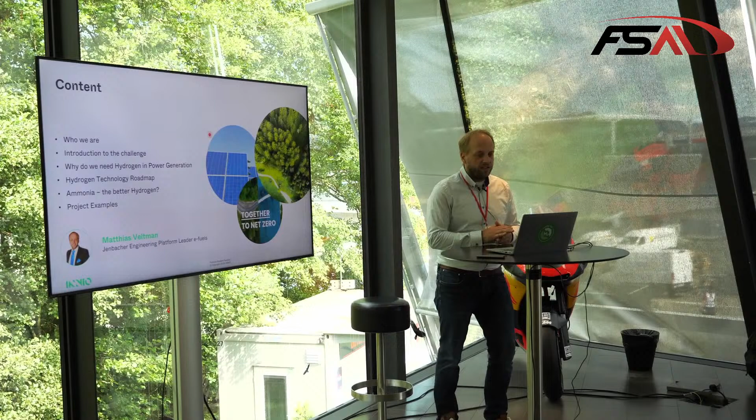So who are we? INNIO Jenbacher really consists of three brands, basically. We got Jenbacher gas engines, headquartered in Jenbach in the Inntal, in beautiful Tyrol, just south of Achensee. We got Waukesha, our US brand for large gas engines, mainly in oil and gas compression applications. And then we got myPlant, which is our digital platform and digital applications, really there to support our customers in operating their applications, their CHP applications or gas compression units, whatever it is that they're using, by providing digital services.

So located with our headquarters in the heart of Tyrol, we have about 1,500 to 2,000 employees right there, and we fabricate all of the Jenbacher engines right there.

And talking of Jenbacher engines, what are we talking about? I said large power generation, and this is the product portfolio basically that you see here that we manufacture in Tyrol. So the smallest engine that we do has right about 200 kilowatts of electrical power output, and we go via our platforms all the way up to plus 10 megawatts of electrical power output. So type 2, 3, 4, 6, and 9, where the numbers refer to the displacement per cylinder in liters. That's where the numbering or labeling comes into place, and you can see we span from a few hundred kilowatts to 10 megawatts in electric power output.

All right, but let's take a look at moving green energy forward, the core of my talk here and what this is all about.

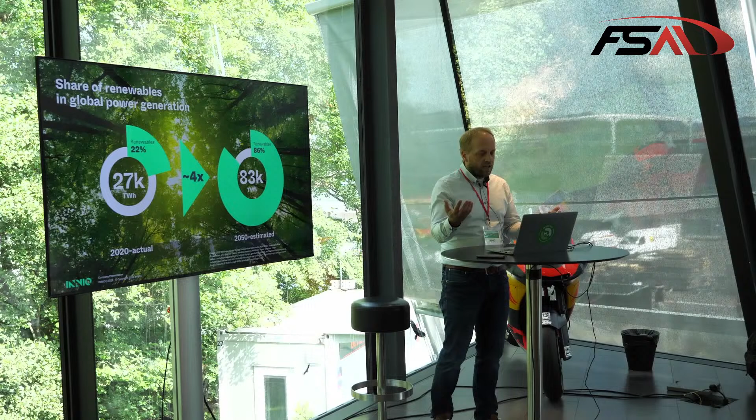So more renewables is an absolutely good thing, but there do come some challenges with it, and we already slightly touched on it: in terms of an electrical grid, we need to satisfy the demand instantaneously. The grid cannot store electricity. We need to provide the electricity at the right amount, at the right time, as it is being consumed.

That brings me to maybe a little bit of a provoking slide, where you could say, well, blackouts are totally yesterday, we have a super stable grid and everything is fine. I could turn this around and pose the question: is this really going to be the case in the future as we have more volatility due to PV and wind? There's a dependency now on the sun shining or the wind blowing, and if there's a cloud that goes in front of the sun, then your PV is dropping, and that needs to be filled in somehow, some way. If you don't do that, then the grid is going to collapse, basically.

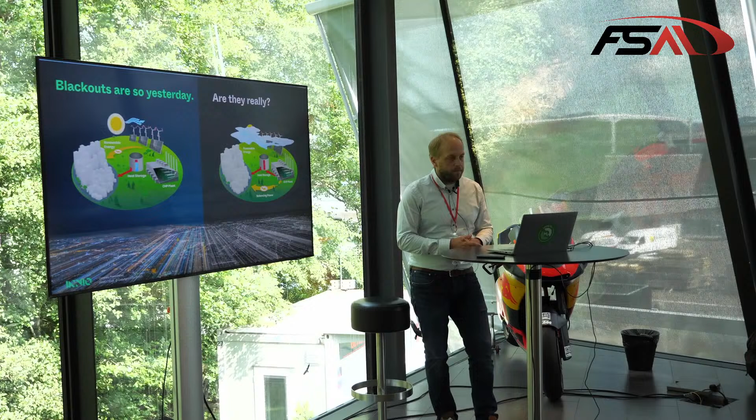Now, I don't think that is a very likely scenario, that we will have shortages in power supply or that we get a big instability in the grid, because there's something that we can do about it, and we'll talk about that in a second here, what can be done in that area.

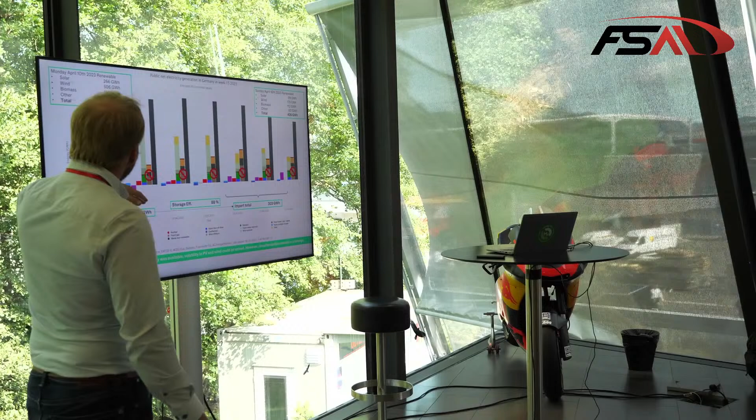Before we get into that, I brought here a real-life example. If you've been with the talk last year, we spent a whole lot of time on this slide taking a look at what's actually happening here. This time I just want to quickly use it to get you the insights and the key message. So we're looking at the electricity being generated in the German net, in a week of April 2023. You can see by the different columns renewables and the other sources like nuclear, hydro, etc. And in gray is the demand.

Crossed out here is fossil fuels, because obviously with the energy transition and decarbonization, we no longer want that. So if you erase that from the sheet, then there is a gap that needs to be filled. On the left side of the slide, this would have been perfectly fine because we actually had in total an excess of electricity available, which led to an export of electricity outside of Germany. But towards the end of the week, that would have been a problem. Not completely a coincidence, I chose the week where Germany also decided to exit nuclear power, which is why you see the red bar disappearing here towards the end of the week.

Now, I don't want to make this a talk about nuclear power, but the key message here is that at the end of the week, there was significantly less production in renewables because of weather conditions not being favorable.

However, demand was about the same, and here we had at the time to fill in with fossil fuels and to import electricity from the neighboring countries with the electrical grid we have throughout Europe, which is perfectly fine. The grid across Europe is a great help to balance between the individual countries.

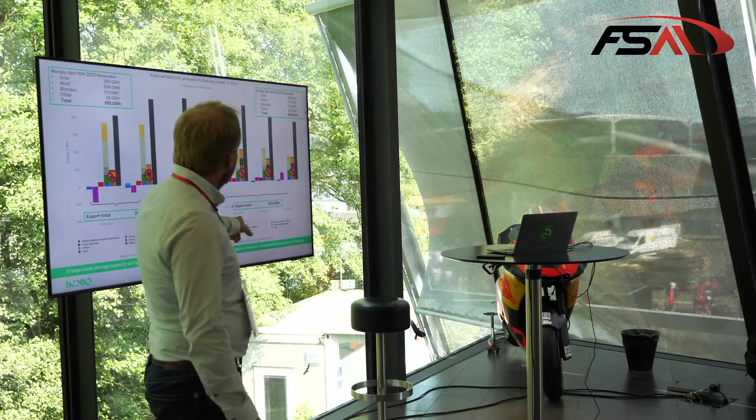But the key here is, if you take a look at the surplus that we had at the beginning of the week, and if we would have been able to store these roughly 350 gigawatt hours at an efficiency of about 88%, we could have avoided any imports towards the end of the week.

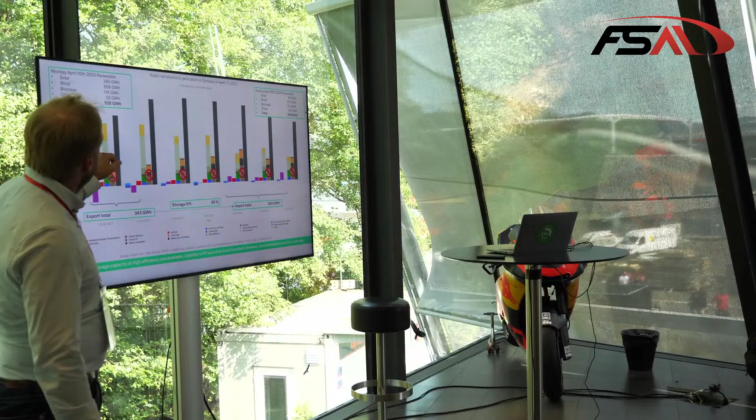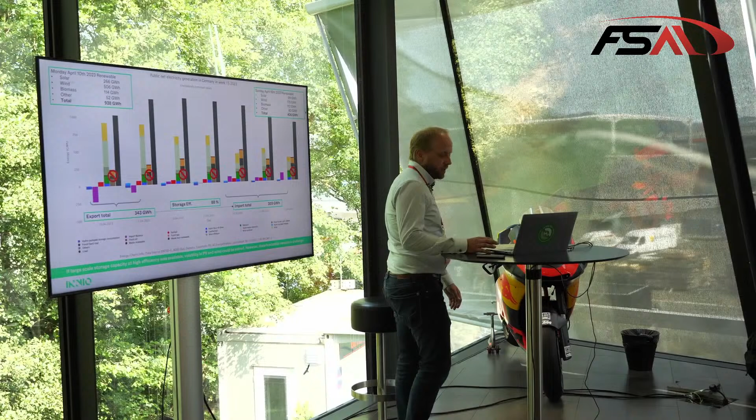So the key message I want to convey with this slide is, as you have volatility in wind and PV, you need to have some ability to either quickly get electricity from hydropower, but we're limited with hydropower due to geological reasons. You can't just build hydropower plants and dams everywhere. Or we need to find a way to take electricity that is a surplus when the wind is blowing and the sun is shining, and store it somehow so that we can use it when we have not so favorable weather conditions. And there's various forms of energy storage.

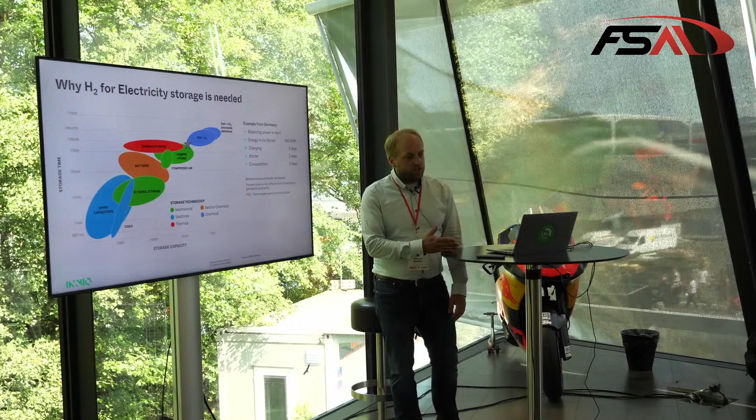Obviously, fossil fuels would be one of them, but we don't want those. So then the next best thing you might think of, as a Formula Student member, is a battery, as you're using that in electric vehicles. But there comes an issue with batteries because the amount of batteries you would need to store the electricity is just not feasible.

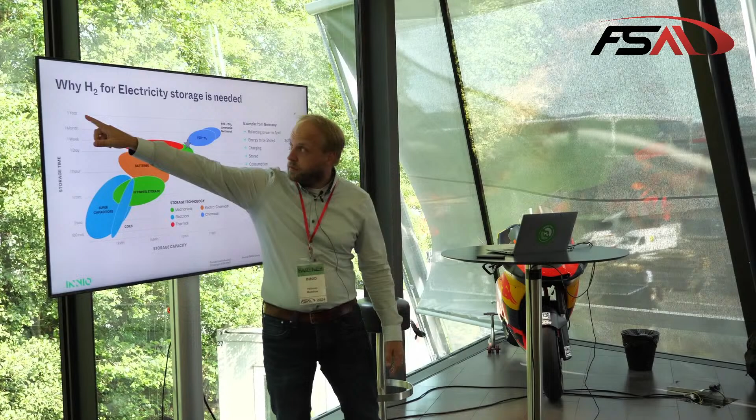And also, if we talk long-term storage, the example was just one week, but if we think about seasonal storage, we have plenty of sun in the summer, not so much in the winter. There's a bit more wind, but it's not quite enough to balance out. So if we could store and shift energy from the summer to the winter, that would be great. But then we're talking about long-term storage on the scale of several months, and the amounts involved were in the range of several hundred gigawatt hours.

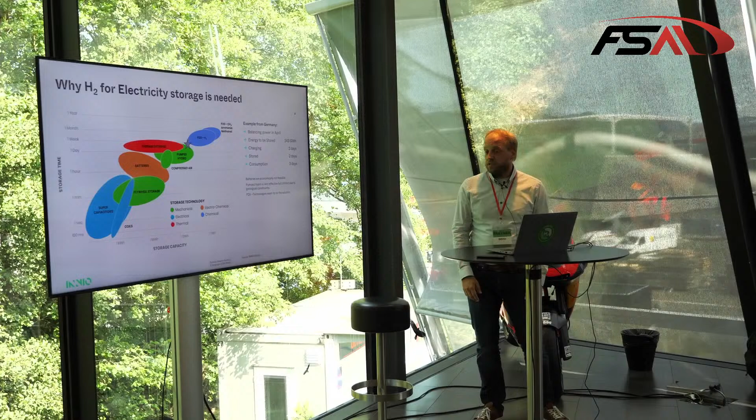So then the only thing that is left here which is feasible is chemical bound energy. We would need to take the electrons and turn them into green molecules of some fashion, which can be stored, and then later on we can turn them back into electricity, or electricity and heat. So how do we do that among all of these technologies? Let's take a look at e-fuels, because obviously that's the most interesting part, at least for us.

And it all starts with renewable energy sources, where you can directly use them in the electrical power grid, which is fine. I'm a big fan of e-mobility too, so don't get me wrong—anything that is light passenger vehicles for daily commuting is a perfect application for e-mobility. Heating in our houses with heat pumps is also a great application for electricity.

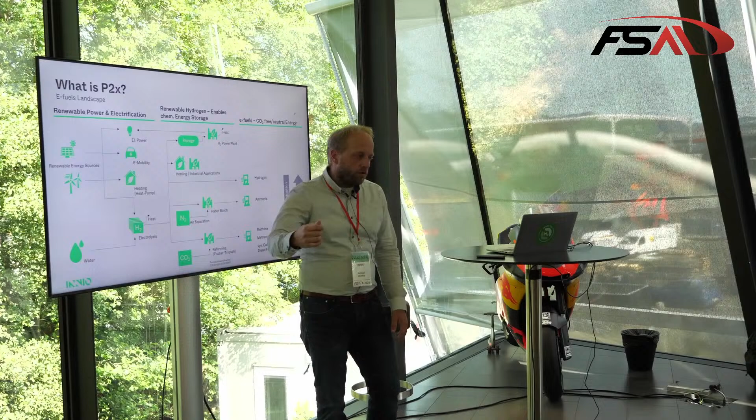But if we want to start storing it, then basically we can take electricity, water, and run it via an electrolyzer. We will get some heat out of it, which we can nicely combine with the heat pump to provide heat. And we also will get H2 as the chemical that has the stored energy in it. There will also be some oxygen, which you may or may not be able to use depending on where you are in the world and what applications are around you. And with that hydrogen, you arrive at the simplest e-fuel basically that you can derive from electricity.

Now this can be used directly. We can store it, we can turn it into an H2 power plant, like the engines that we basically produce, and turn it back into electricity at some point in time. You can use it in furnace applications directly or in industry. You can also use it for fueling stations with fuel cell vehicles, for instance.

Now for the second part of the talk, about ammonia. We can further process hydrogen under the addition of nitrogen, which makes up about 79% of the atmospheric air. So you go through an air separation process and arrive at nitrogen. In the Haber-Bosch synthesis, you combine those two and arrive at ammonia, NH3.

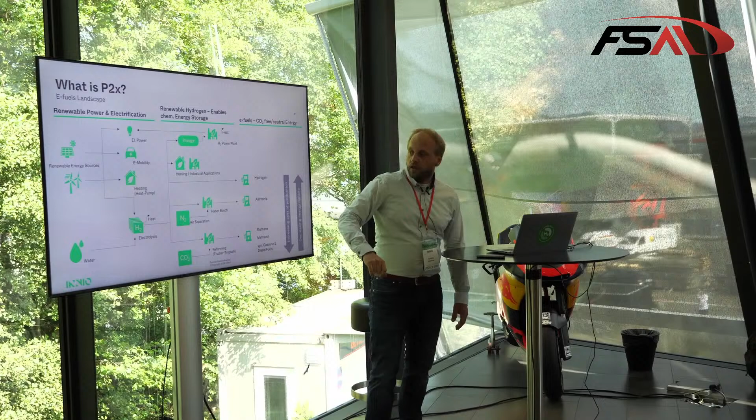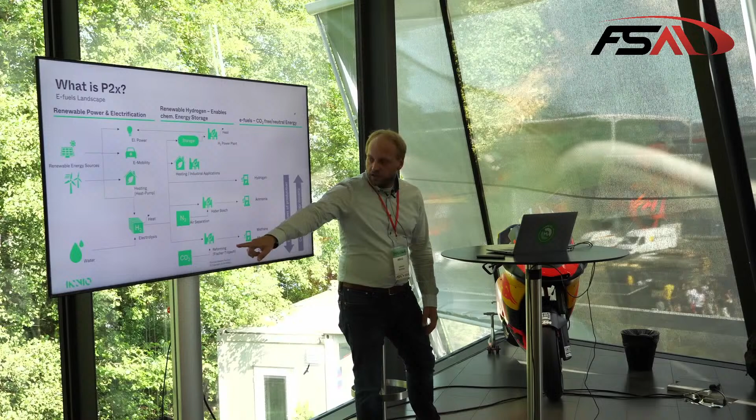We'll talk about the advantages and disadvantages of that in a second. Or, towards the bottom end of the chart, if you have a source of CO2 that hopefully is really CO2 neutral or renewable, you can combine hydrogen with that CO2 to arrive at even longer hydrocarbon chains like methane, methanol, or even synthetic gasoline and diesel fuels.

Now, if I talk about e-fuels, I talk about hydrogen, ammonia, and methanol. Methane is a special case. You can synthesize e-methane, but that's not a big challenge for us because natural gas consists of 90+% methane. So it doesn't matter if it's natural gas or e-methane, we can work with that anyway. From an R&D perspective, hydrogen, ammonia, and methanol are the three key fuels that we care about at INNIO.

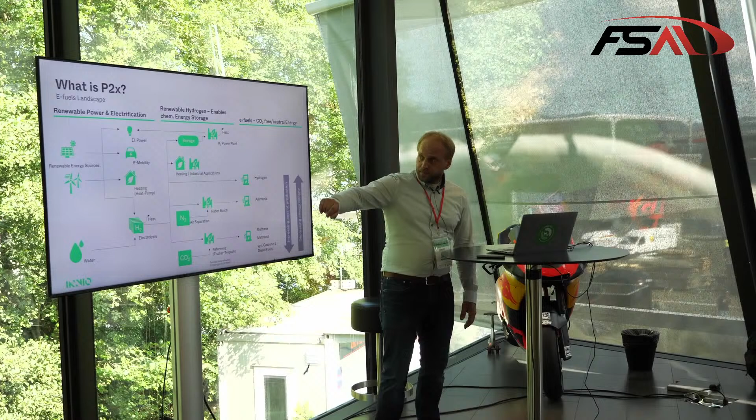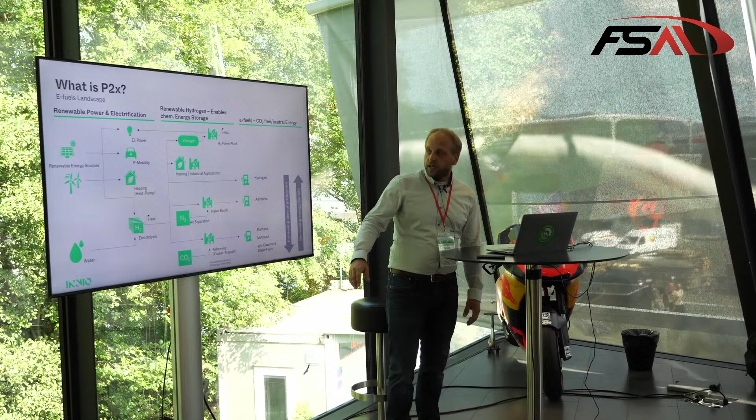Now, why all the hassle, you might ask? There's one very important thing when it comes to storage and transport of these fuels. Hydrogen is the easiest to produce, therefore most cost effective, but it has the least energy density, so it's very difficult to store and therefore not very attractive, but it's the cheapest among those. Any additional synthesis costs money, and it's an additional step in the process which comes with efficiency losses, so there's some energy loss, typically as heat, that can be used.

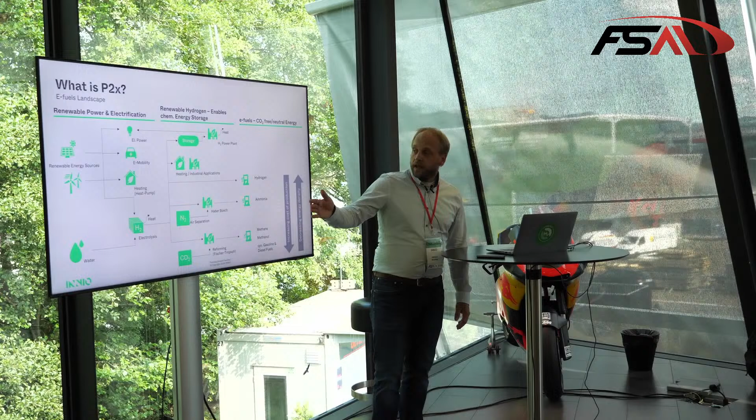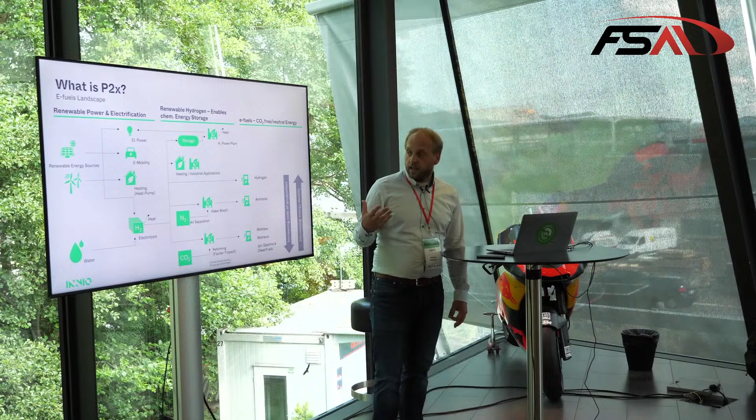So if you go down the chain, it gets more costly for these fuels, but the energy density goes up, which makes it very interesting from a storage and transportation perspective. So, hydrogen, ammonia, and methanol are the fuels we're looking at.

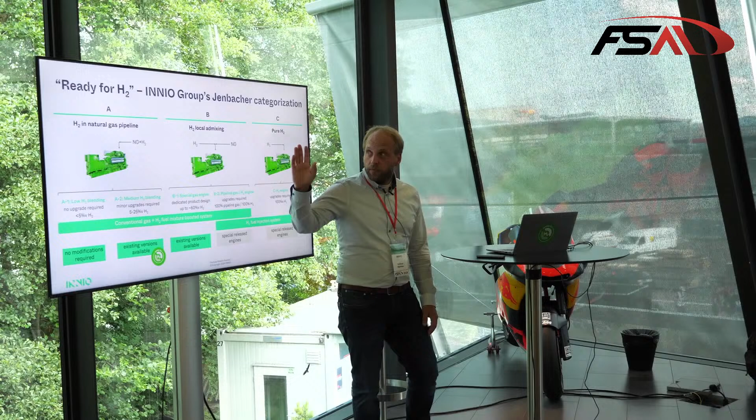Let's quickly take a look at what we've accomplished so far at INNIO. We're basically done with our product lineup for category A on the left-hand side, which is blending hydrogen with natural gas. Up to 5%, you don't have to modify anything on the engine. At 25% blending, there's a little modification needed, but that's also a done deal. You can get that on any of the products. This development is taken care of.

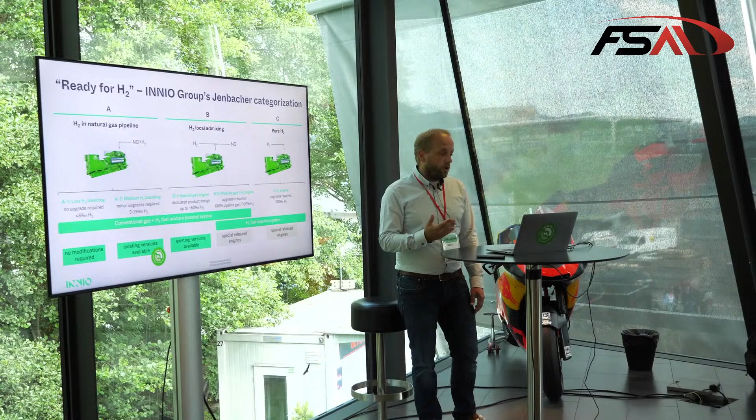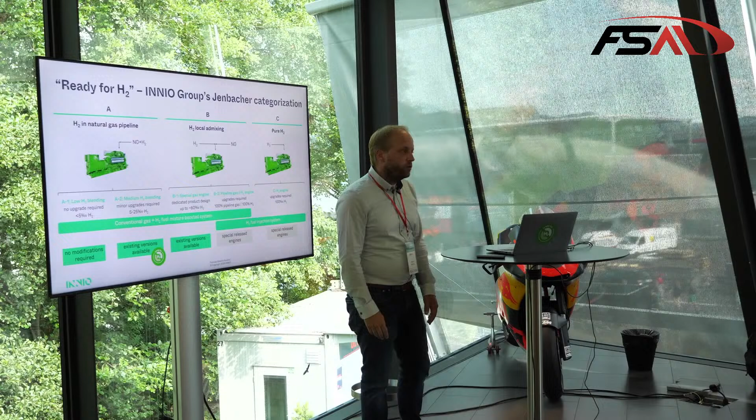From our past applications in the special gas world, we're able to burn mixtures with up to 60% hydrogen. Any wood gas or synthesis gas typically has those high H2 concentrations, and we have product available for that too. The really interesting part is on the right-hand side with category B2, or even C. B2 would be a dual fuel engine—you can run it either on natural gas or on 100% hydrogen. Category C would be a 100% by volume hydrogen engine, also available in our product portfolio.

Now, we did the judging this morning on the INNIO Hydrogen Challenge, talking about fuel properties and how they impact engine design or utilization. This isn't going to be a quiz, so don't worry, you don't have to memorize all those numbers, but there are a few things I want to point out that we also discussed this morning.

We found that fuel tanks for hydrogen are very big on the Formula Student race cars, because hydrogen, stored in its gaseous phase, has a very low energy density. That drives the need for large fuel tanks, which is a problem for mobile applications where you need to move the hydrogen with the machine. As in the Formula Student car, you end up with very big tanks that you don't know where to put or how to handle.

Things get better if you liquefy it, but liquefying always means some boil-off, which is a certain challenge. Ammonia, on the other hand, is superior to hydrogen with respect to energy density. You can liquefy it at just 10 bars of pressure and ambient temperature, much like LPG gas. In its liquid state, it even has more energy per unit volume than liquefied hydrogen. So, to spoil the end of the talk, ammonia being the better hydrogen—there's a strong argument for that from a transportation and storage perspective.

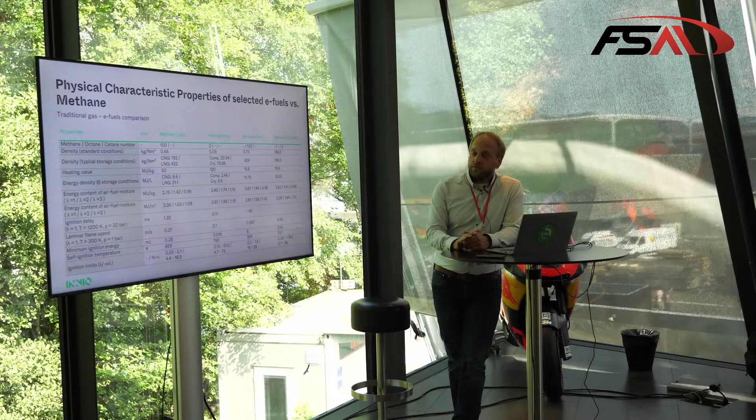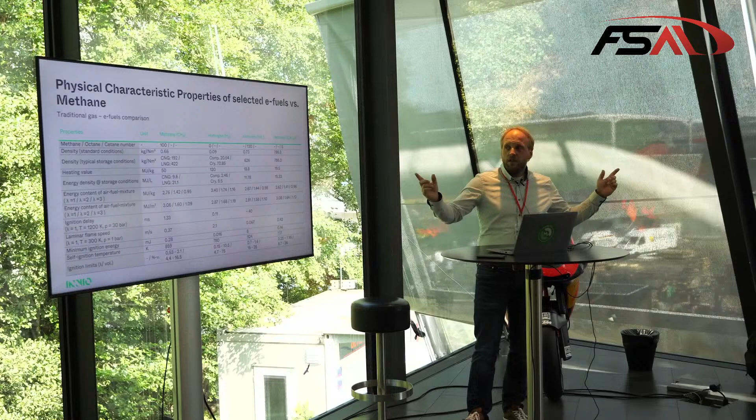Now, in contrast to the challenges we have with hydrogen on storage, and the beauty with ammonia, things reverse if we take a look at combustibility. Hydrogen is a superior fuel, very wide ignition window, forms combustible mixtures in air at a very wide range, easily ignitable, which obviously puts out some fear about this being a very dangerous fuel. But if you take account of the physical properties and take the appropriate measures, like you would on a natural gas engine, this can be handled. This is not any more dangerous than natural gas if the appropriate measures are in place.

Ammonia, on the other hand, is a horrible fuel. In fact, there is research going on right now that says ammonia is not combustible. It is the presence of an ignition source that causes the ammonia to start decomposing, and the hydrogen that's then present will combust. Due to the heat released, additional ammonia will decompose, but the NH3 itself is not combustible. Yet we can use it as a fuel in an engine.

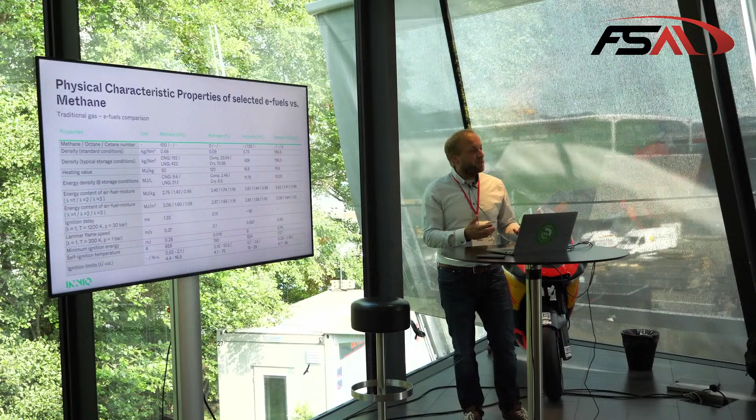It's just got to be a little harder to ignite it and make sure the engine is operating. So that's the drawback of ammonia. It's also toxic, so that's not very good. The good news is that you will smell it a long time before it's getting toxic, and you will naturally escape the ammonia cloud because you can smell it, and it's such an intense smell it will scare you away.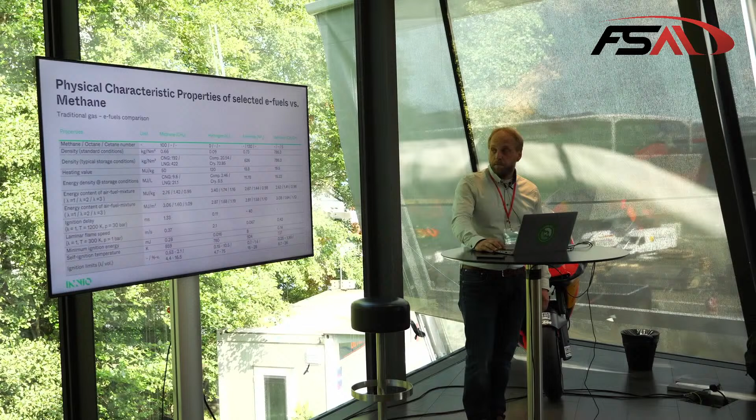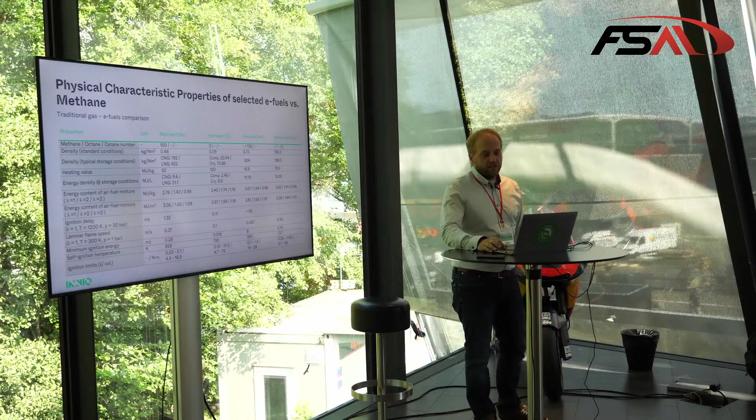So for both fuels we have to do something. Hydrogen, we basically have to slow down the combustion process, think about measures to slow it down and make it more like natural gas to use it in our engines. For ammonia, on the other hand, we've got to speed things up. We've got to teach ammonia to quickly burn, otherwise this is not going to work.

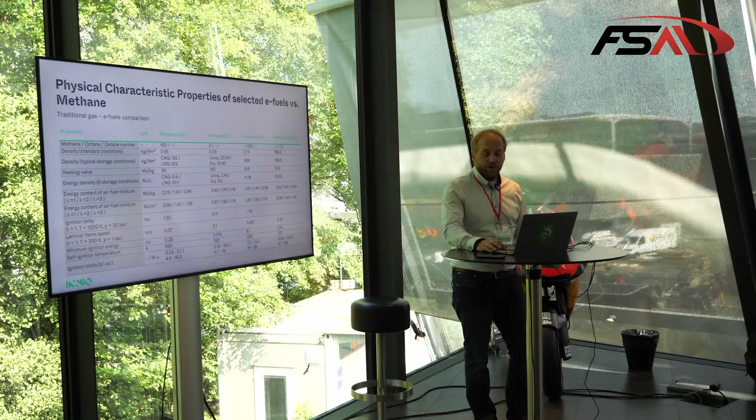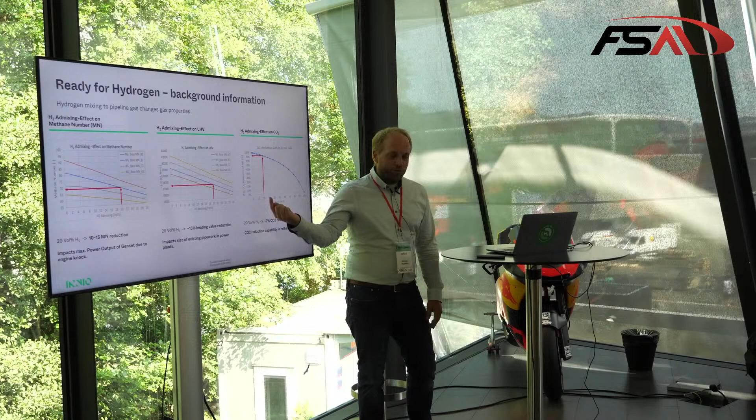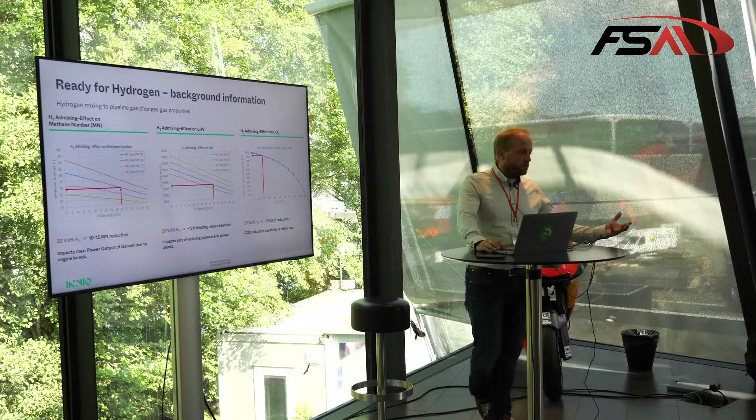Just quickly to complete the picture here, there's much talk in the industry about 25% H2 admixing into the natural gas grid. While I think this is a good step in the right direction, and it comes with little challenges that can be addressed, the biggest drawback is this is H2 by volume, not on an energy level. So if you think of CO2 reduction, 20% H2 by volume will actually get you only about 7% CO2 reduction because of the vast difference in density between hydrogen and natural gas. So definitely a right step in the right direction, but we can't stop there. We've got to take this seriously. We've got to work on the 100% H2 solution in order to fully decarbonize the system and make it work.

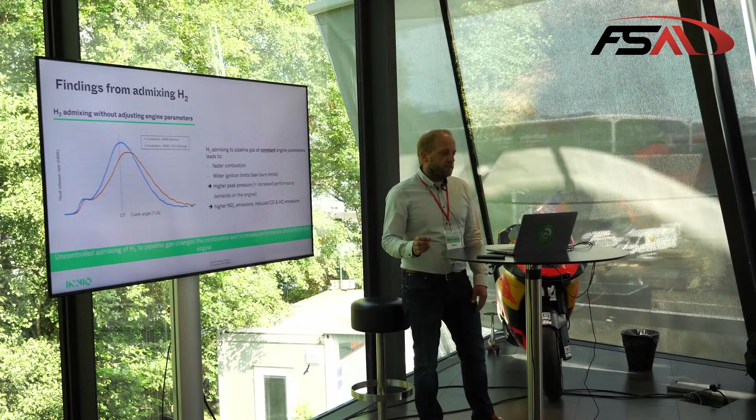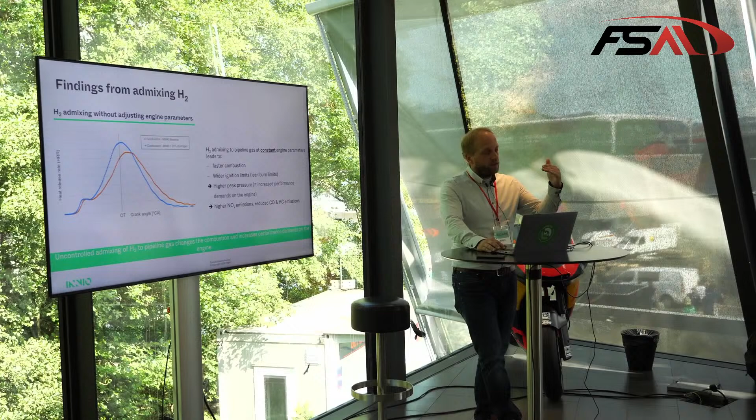In order to do that, we have fitted our engines with special software and an H2 sensor, where we basically sense the amount of H2 present in the fuel, and then a special compensation algorithm adjusts air-fuel ratio and spark timing so that we maintain the same emission level, the same stress on the unit as if there was no hydrogen present. Fairly easy setup, can be retrofitted at any time to our product, and basically enables you to burn up to 25% hydrogen.

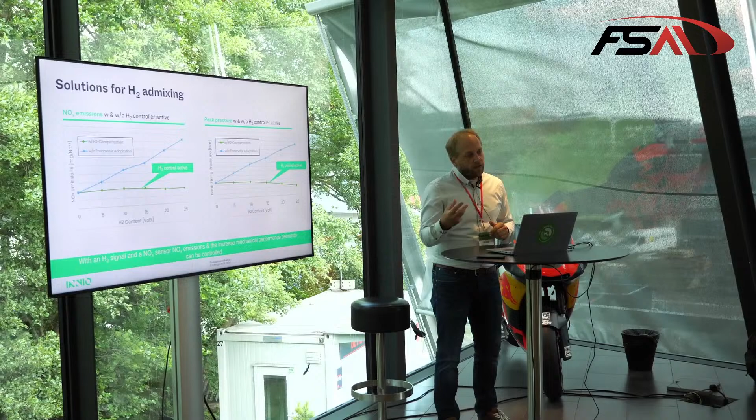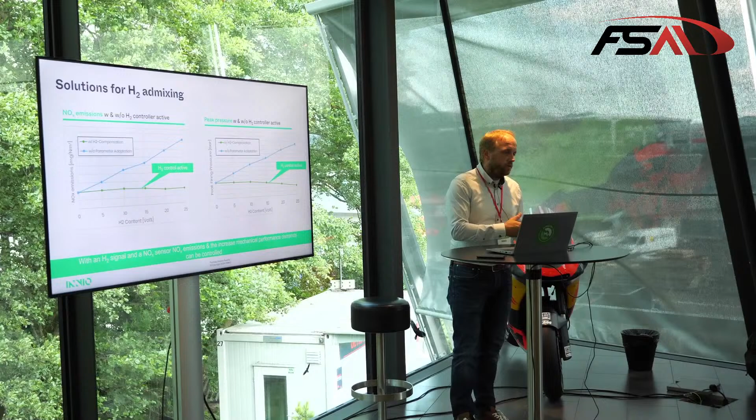Yes, please. Where do you measure the H2 content? Is it in the intake? In the fuel line. We measure it in the fuel line. Because in the intake, you would already have air mixed into it. Yeah, so we measure in the fuel line, and there we get the H2 reading, the concentration of H2 in the fuel, and that's the input to our compensation software. We could also get an external signal, so we can avoid our own sensor if the content is known. Then that can be provided externally, and our ECU can also work with that.

But that's 25%. Okay, so let's talk about the fun stuff, right? The 100%.

Because this is where the rubber meets the road, and this is where the fun really starts, in my opinion, at least, right? Because things get a whole lot more challenging. But we figured it out for our Type 4 product. So what do we do?

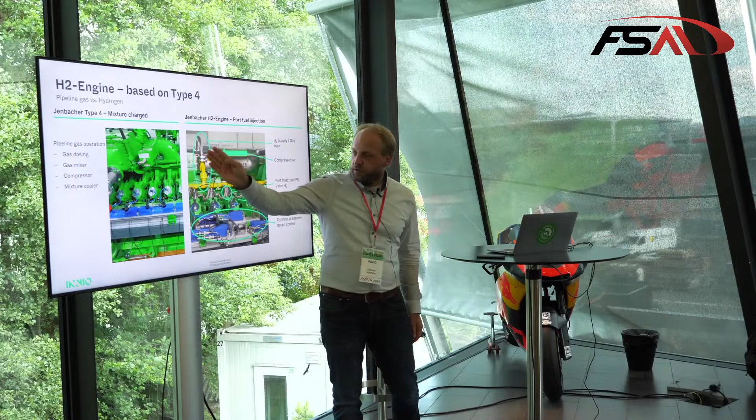I brought a sectional view here. Type 4 engine on the left is our conventional natural gas product. This is operating pre-mixed. Pre-mixed means we introduce the natural gas with the air in front of the turbo. Both get compressed, then there's an aftercooler in place, and then we feed it to the individual cylinders.

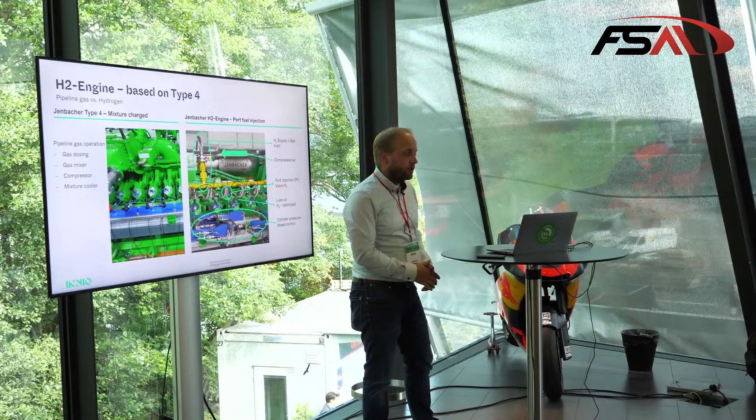For hydrogen we don't do that, because the large volume that we have present there is, if that would ignite, then there's a large amount of energy being released. So our Type 4 engine has port fuel injection valves fitted to the individual cylinders, also including advanced cylinder pressure sensing and engine controls, which enables us to burn hydrogen at 100%, natural gas at 100%, or anything in between, because we can blend natural gas and hydrogen per the customer requirement.

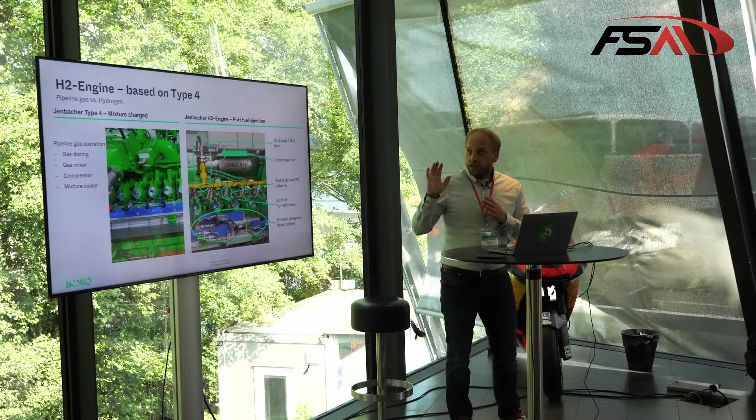So there's a lot more work that went into it. From a combustion perspective, compression ratio and valve timing have been optimized to find a happy medium between natural gas and H2. Also on the lube oil, there's a lot that needs to be done, because lube oil naturally combusts and forms deposits in the combustion chamber. These might act as an ignition source, and then you get into abnormal combustion events which are really harsh on the engine and need to be avoided.

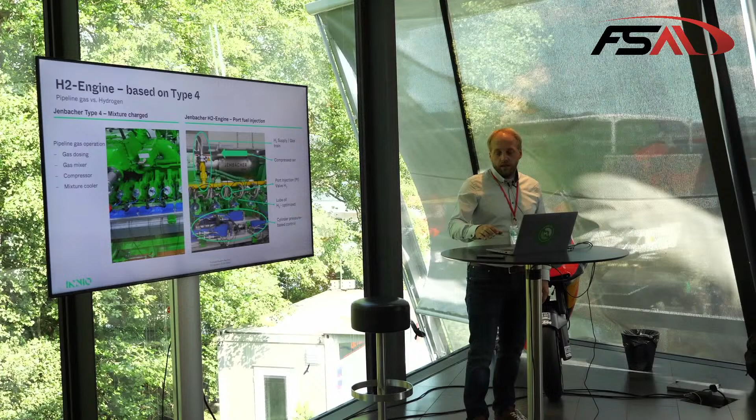So we use special lube oil with a special formulation to address that, and the advanced controls help identify pre-ignitions and mitigate them accordingly, so we can handle abnormal combustion events. That's one of the biggest challenges with this lean burn application. But it's there, and you can buy it for our 412, 16 and 20 cylinder engine, serving anywhere between 600 kW and about a megawatt in electrical power output.

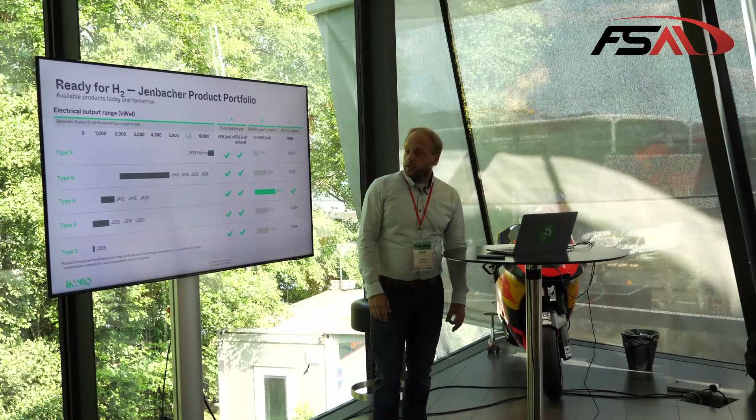So if we take a look at our complete product portfolio, I told you 25% was no big deal - that's easy with the H2 sensor and compensation software. 100% with the lean burn, we've demonstrated here on Type 4. That's checked off. So what do we do now? What's next, you may ask?

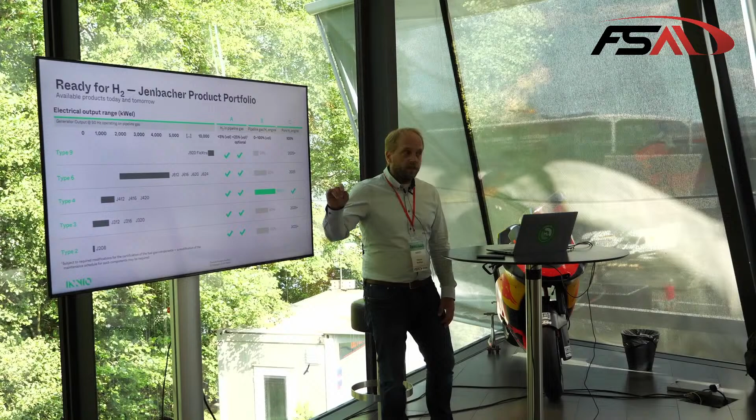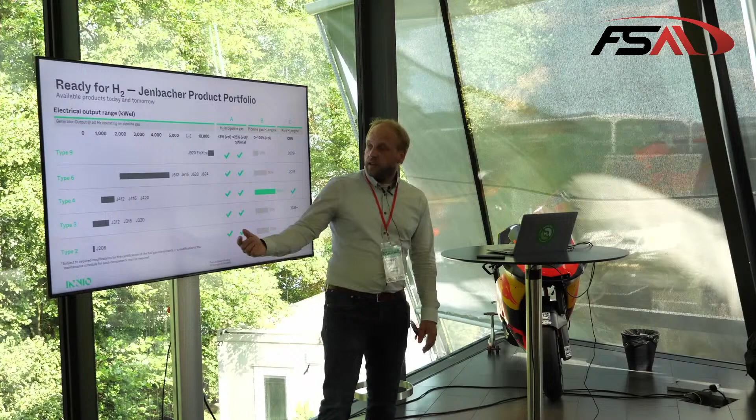Well, what we're doing right now is working for 2025 on our Type 6 engine. We're stepping it up a notch to a higher power output. If you've watched really carefully, you might see that the natural gas power output depicted for the Type 4 is actually higher compared to the Type 4 100% H2 engine. So the 100% H2 engine has a de-rating compared to its natural gas version, because the technology and development we've done there is not as advanced as what we do on the Type 6 engine.

So for Type 6, what we'll be looking at is basically full power compared to the natural gas engine, and similar transient response also for that product, so that virtually there's no difference between natural gas and H2 anymore.

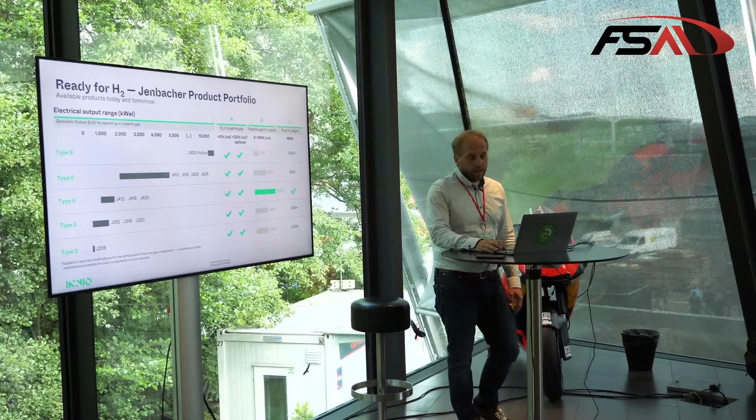So that's the outlook: Type 4 done, Type 6 is coming up next, and after that we'll work on Type 9. We take a close look there, because the availability of hydrogen in the market is basically providing the business opportunity, and based on that we pace ourselves with the development of the Type 9. But the advanced system we've developed for Type 6 - there's no doubt in my mind this will also work on Type 9, getting a very high power output at the same transient response that we have today with the Type 9 engine.

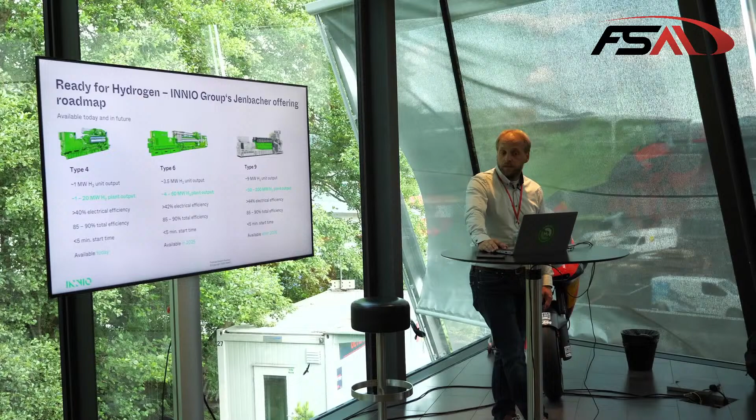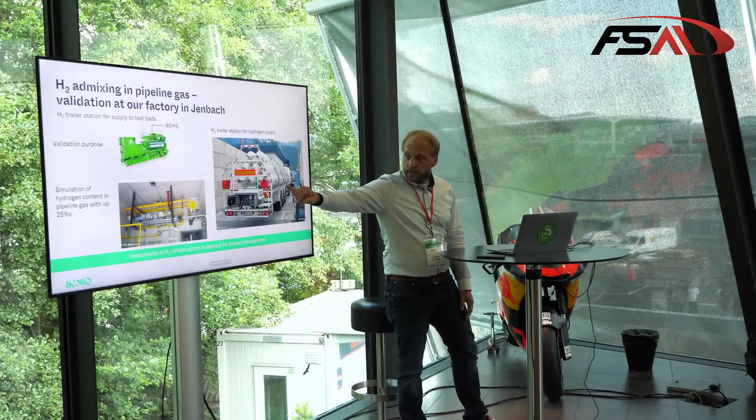So let's take a quick look at how this looks when we work with hydrogen. In the old days, we brought in tube trailers like this one that have the hydrogen stored inside, with two walls to the left and right acting as shield protection in case of any fire, so we don't set anything next to the trailer on fire. Then there's a pressure tableau where we hand the hydrogen over to an underground pipe system that distributes it to our test benches.

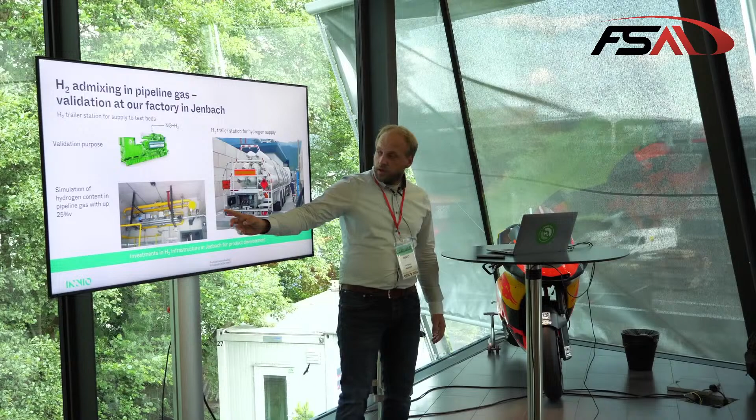And then that's a picture of a test bench where you have the gas regulation unit. Very similar to what's been presented in the hydrogen challenge today in terms of shut-off valves and pressure regulation system. Same deal here, just a bit bigger, a setup which enabled us to do the appropriate research.

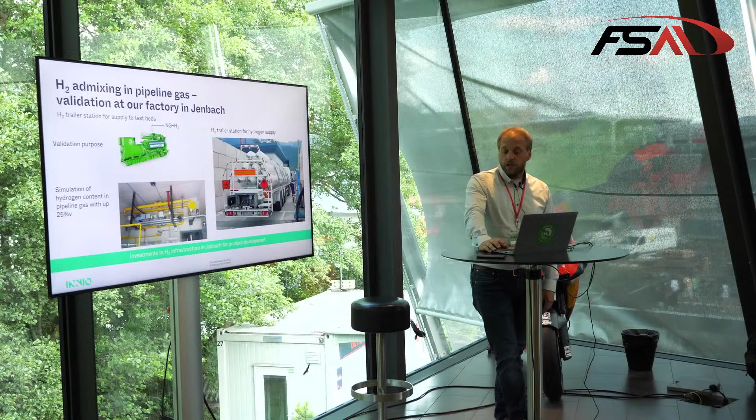But things are changing. At our factory, depicted right here in beautiful Inntal, we have power sources from PV, for instance. We also have a small water power plant. And what we're taking a look at is the energy landscape, not just the engine, but all of the energy sources available to us.

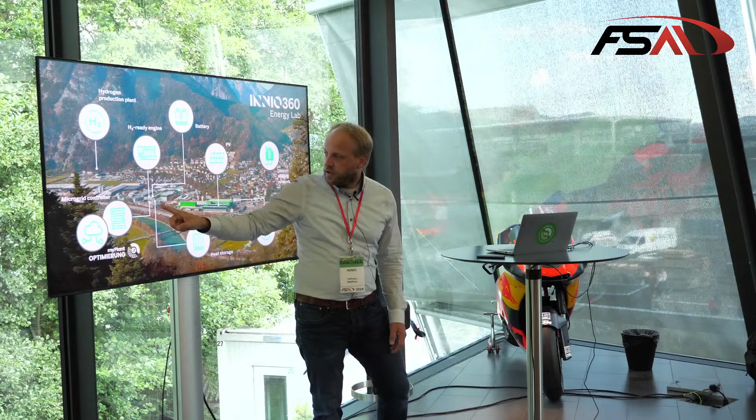In our case, for INNIO, that's our small water turbine, and that's also PV. We obviously have a grid connection, but we also have a cooperation with T-Next, where right in the corner is the Achensee Kraftwerk, a hydropower plant, with a PV field also installed there. That's where we're setting up an electrolyzer right now, which will produce hydrogen, store it, and then we'll deliver it via pipeline past our neighbor's property, Binderholz, into our facility, right about in this area, where we'll get our own produced hydrogen to do engine testing. This is really key because the nightmare logistics with the trailer come to an end, and we also have much higher quantities available.

You have to think that for a Type 4 engine, with these trailers, we consume about one a day. For Type 6 testing that we've done so far, you go to 2 to 3 of these trailers per day. So that's a challenge, and the system we're setting up here is quite interesting and actually helping us a lot.

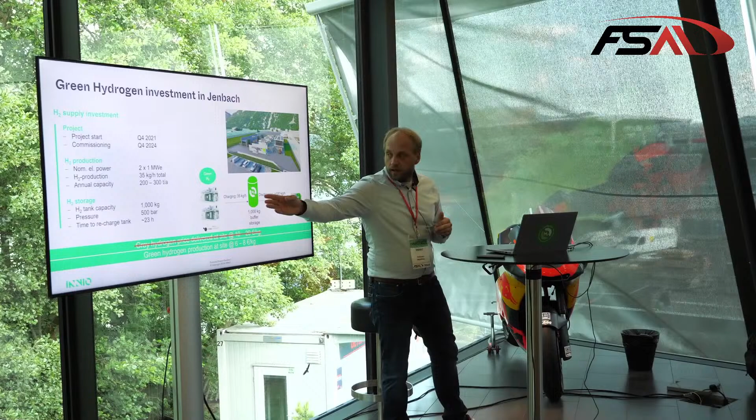We'll be starting with 2 megawatts of electrical power output from the electrolyzers, and we can go up to 6 - that's what the site is laid out for. We have a 1-ton storage, and we can discharge in excess of 100 kilograms per hour to the factory. With the buffer tank, we have the opportunity to decouple - you run the electrolyzers 24/7, but engine operation is only on first shift, so the buffer tank helps you get the right fuel quantity at any time.

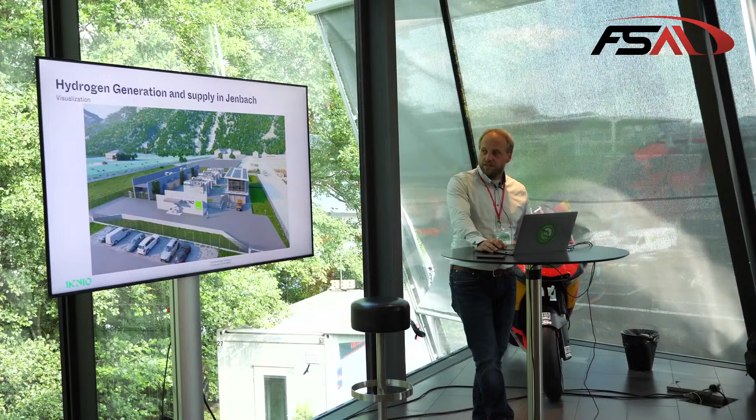This is what the site's going to look like in the rendering. We have some administration building infrastructure, a PEM electrolyzer right here, then compressor and storage over here. We can also bring in trailers to consume hydrogen or provide hydrogen externally. There's also a hydrogen fueling station, but that's not going to be built, because from an application and permission standpoint, that's a nightmare if you want to operate a hydrogen fueling station. So that's not going to be set up, at least not in the first stage.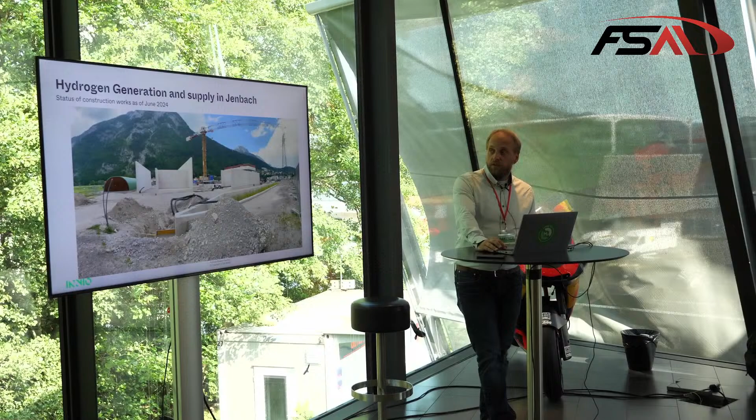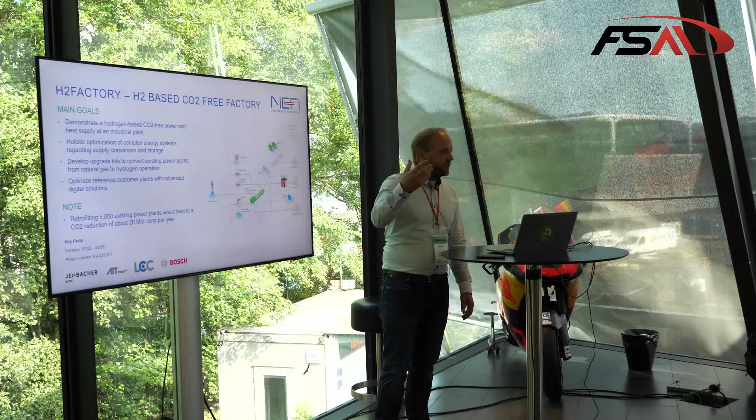I talked a little bit about the whole energy ecosystem, with the hydrogen engine being at the heart of it. But we're not limiting ourselves to that - as I said, we have PV and also a water turbine available to us. We also have boilers at the site, and 3 large hot water heat storage systems. Now the interesting piece is if you take this one step further and look from an energy management system perspective at the whole factory: if I have electrolyzers, if I can store energy chemically in hydrogen, if I've got a CHP application running on hydrogen, I can also store hot water to decouple heat production from electricity demand.

Then the question really becomes: when should I operate what in order to be least dependent on fossil fuels, have the least emissions in terms of CO2, and have the biggest independence from the grid. There could be different scenarios.

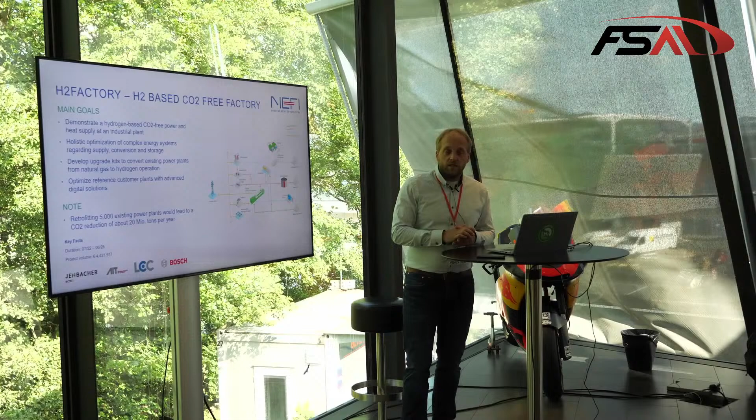With the New Energy for Industry project, which is publicly funded through INNIO, we've teamed up with the Austrian Institute of Technology in Wien, the Large Engine Center at the University in Graz, and Bosch in Hallein to do advanced development, from upgrading the fuel injection system to understanding the whole ecosystem, and coming up with an overall optimization algorithm, a microgrid control energy management system, to ideally operate our plant, but also to turn this into our myPlant digital solution to help our customers operate all their different assets for the biggest benefit.

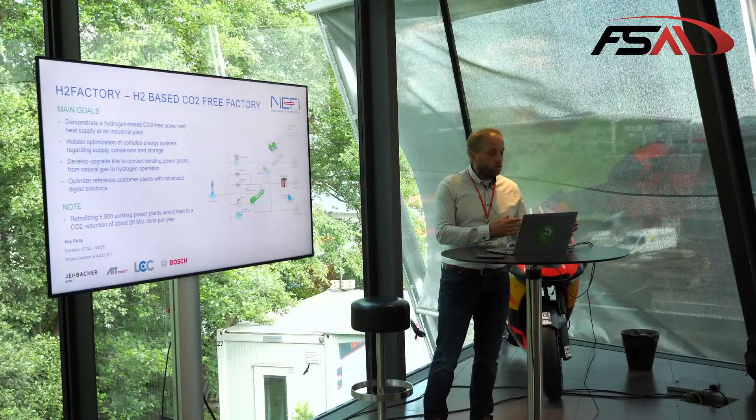They can define what that benefit is, whether it's lowest CO2 emissions or lowest cost. That's up to them. But taking a look at the whole landscape is essential, because with weather prediction, forecasting, and storage capacities, this becomes much more effective as an energy solution than just the CHP alone.

So let's wrap it up here quickly with ammonia. We had this table before, so I'm not going to talk about it much again. But is ammonia the better hydrogen?

Well, two aspects: we talked about advantages in shipping, and the biggest advantage there is we can import chemically bound energy from around the world. This is a big advantage because the European Union has a dependency on energy imports of about 50 to 60% of all the energy we consume, and we will not get rid of that in the future. So we will rely on energy imports, and ammonia could play a key role here.

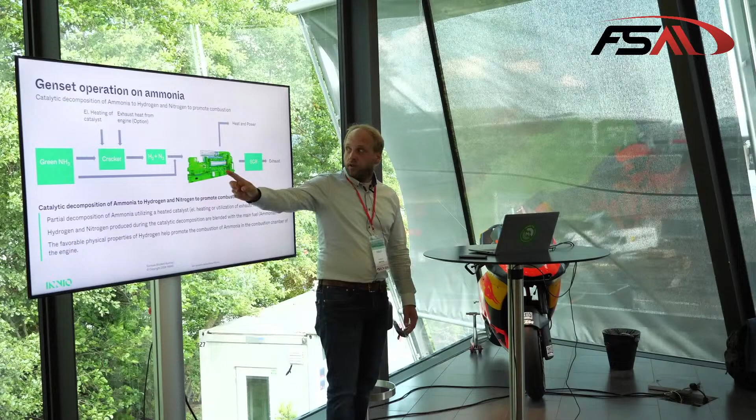Now, what did we do in order to burn ammonia in our engine? As I said, we need to promote it, since it doesn't combust very well on its own. What we do is use green ammonia from electrolysis of hydrogen and Haber-Bosch. We crack some of it in a catalytic process where we arrive at H2 and N2. We mix that in with the remaining NH3, and then feed it into the engine to burn it. So the H2 within the ammonia is basically promoting the combustion process.

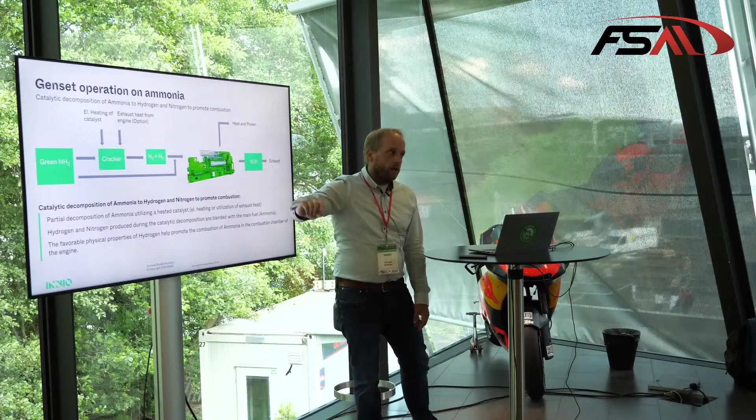How exactly do you crack it? I choose not to say — no, I mean, it's a catalytic process. You basically reverse the Haber-Bosch process. You need to provide an activation energy, and with the appropriate catalyst, the ammonia will decompose. At what temperature does this happen? Depends on the catalyst you use, but it can be done at the exhaust temperatures observed in an engine — if we talk about 300 to 400 degrees of exhaust coming out of the engine, running the cracker at that is enough.

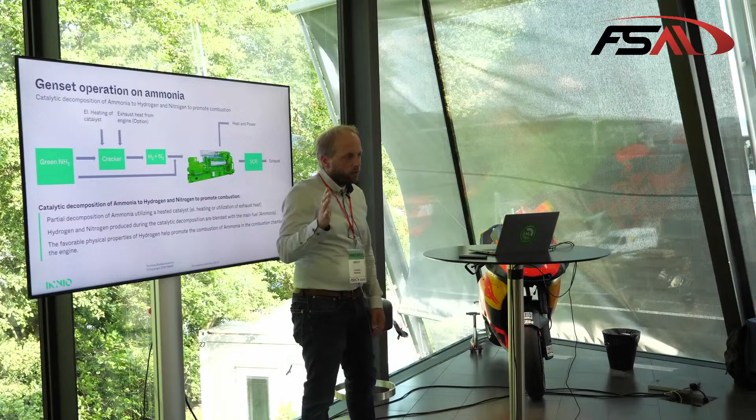And we're talking here about a small amount — up to around 5% in mass throughout the entire cycle is what's needed.

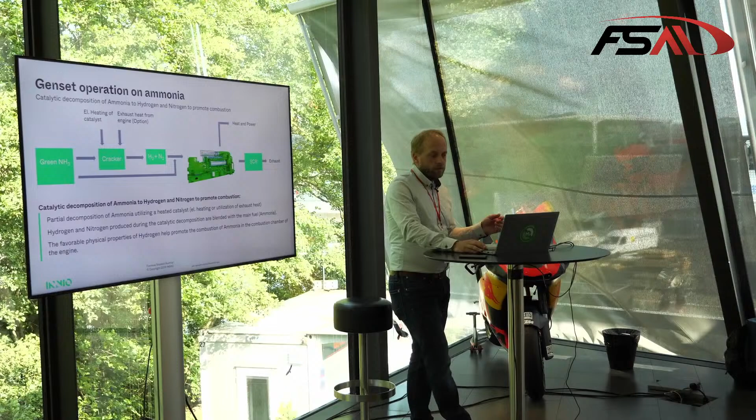No secondary fuel is needed. In marine and shipping applications you might often find diesel pilot fuel injections, but we don't need any of that — there's no secondary fuel. It all comes back to the ammonia, and it just takes some of it to decompose and promote the combustion process.

Is this engine supercharged or turbocharged? All of our engines are turbocharged. Typically, the 624 — the 24 cylinder — and the Series 9 engine, our largest engines, have two-stage turbocharging. All of the other engines have single-stage turbocharging.

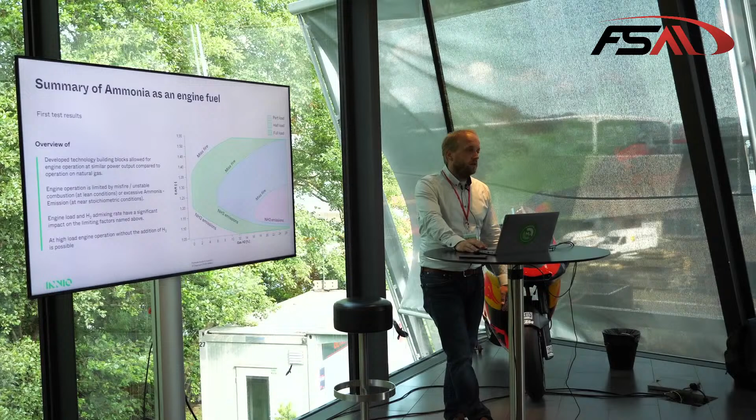How big is the overboost?

The pressure ratio depends on the application and where we run it, but with two-stage turbocharging you get pressure ratios of 5 to 6, and for single-stage turbocharging, depending on the engine size and trim, you might be anywhere from 3 to 4 for pressure ratio.

What is the impact on this graph? We would have a third axis showing the pressure. Does it have a big impact? No, you wouldn't see that on the slide, because what this is showing is the operating regime for a certain load. What you would see is the manifold pressure correlating to the load. So indirectly you already have it here, because we have a defined volume in the cylinder. If you want more power out of it, more fuel and air needs to get in, and therefore you need to boost it harder. So you have your boost pressure indirectly with the load on this graph already.

But in terms of a wide operating window, what helps there is the overall increase in pressure in the combustion cycle and the overall increase in temperature in the combustion cycle.

Let me wrap up with two last examples I want to point out. With the Type 4 engine, 100% H2, NorthC data centers in Eindhoven, Netherlands, we have set up the first data center in the world running on a hydrogen backup system. Six engines have been provided there to the data center, and we can comply with all of the fast starting requirements and frequency deviation requirements, so that this data center, even in a backup situation, is running on 100% H2, no CO2 being emitted.

The second very cool project I like a lot and want to point out is happening right here in Austria, in Upper Austria, Gampern. This is the world's first underground storage for hydrogen. Here you can witness exactly what I was talking about in the beginning: PV and wind is being used to do electrolysis, and H2 is being stored underground. This is long-term storage, shifting energy from summer into the winter.

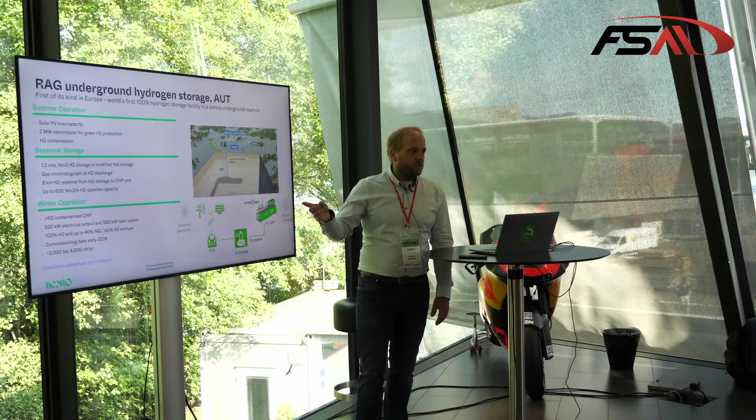You might argue that a lot of the inefficiencies in here should actually eliminate the feasibility of this process, because it's so much better to use electricity right away, but storage is the key here. If you're able to store that electricity or energy for a long period, the efficiencies become almost irrelevant, because you can turn a benefit on this while providing much needed electricity and heat at a higher price tag in the winter than producing the hydrogen in the summer.

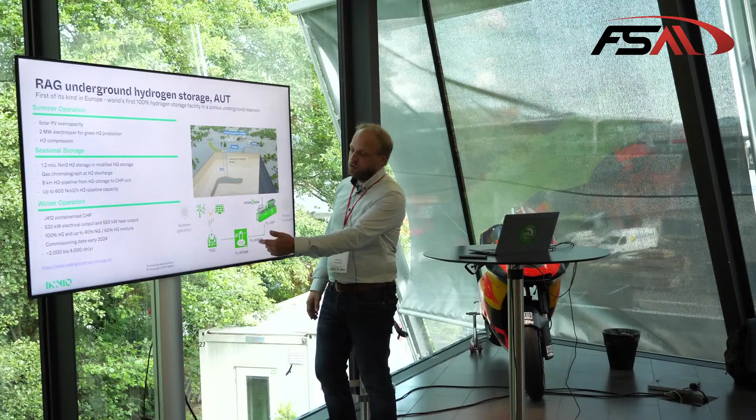How efficient is such a well storage? The storage itself is fairly efficient, because you pump the hydrogen underground, and as it's coming back up, it's the same, right? You have some losses because you need to compress it, so there's some electricity needed to compress it as you pump it underground. The electrolyzer will have about 60% electrical efficiency, and for our gensets we talk 40 to 43% electrical efficiency. So if you go from electricity to electricity, there are quite some efficiency losses in between.

No questions asked, I don't want to deny those, but the ability to store large amounts for a long time is really the key here for these applications, and I think those will be key to really decarbonize our renewable world and turn this into a zero CO2 economy.